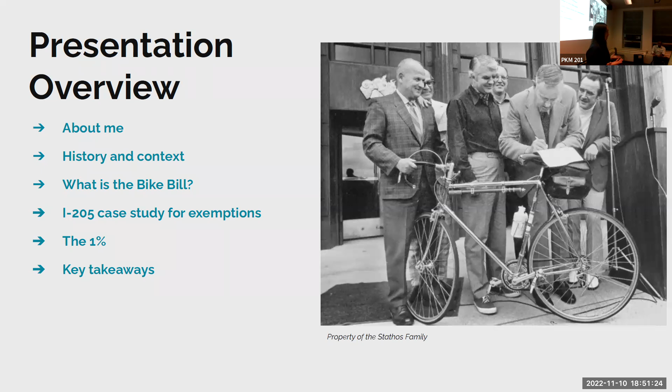Okay, so a little bit of background about me. I have an interest in advancing biking and walking in Oregon, and I've done that through different capacities.

I actually first met Judge when he worked for the state of Oregon in the governor's office, the executive committee's office, when I was recruited to be a member of the Oregon Bicycle and Pedestrian Advisory Committee. In my role on that committee, I was asked by a community member to look at ODOT's interpretation of the bike bill as it applied to the I-205 freeway expansion project.

My passion also is accountability and transparency, and trying to demand that from our agencies, because as public servants we need to demand and see what we're getting from our investments. I don't know if I'm good at it, but I do demand, and I ask a lot of questions.

Through this work, or through being on OBPAC and exploring the bike bill, that was the inspiration for my graduate school capstone. So I dug deeper into the policy implications of the bike bill and wrote a paper on it. You can download it after class if you'd like to read through it.

As a result of this work, I worked with the Street Trust when Judge was there too. We have these connections, and we helped introduce an update to the bike bill, which was unsuccessful in the last legislative session. That was SB 395, Safe Routes for All.

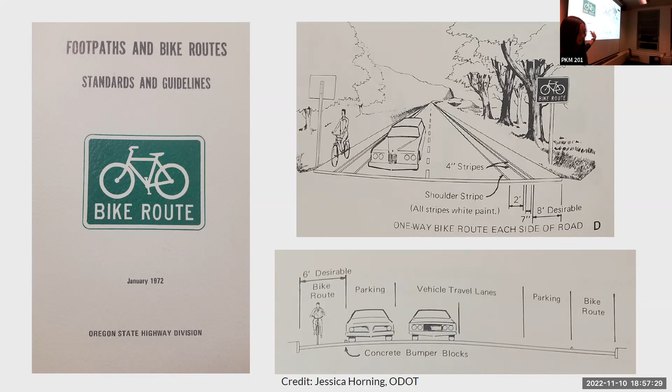So in Oregon, here are some statistics. Oregon by the numbers: we have 2.2% of commuters biking to work. Remember the goal was 23 to 24%. In Portland it's around 5 to 7%. I'm not quite sure what the commute mode is these days because of the pandemic.

The percent of bicycle fatalities is 1.9%, a little bit lower than average. We expend annually about 21 million of the state highway funds on biking and walking - that's ODOT's average from 2014 to 2016. So just some quick numbers.

But the thing that's really striking is that in the last 50 years, the percent of urban state highways with bike lanes and sidewalks in 2019 was 39%. So in 50 years, we've only been able to build 39% of the bike lanes that ODOT has planned out.

Now I'm going to go through each one of the different pieces of the law, because I think it's really important to understand what each one means. The first is: when does a project trigger the bike bill? You can go to the ODOT website in their highway design manual. I know there's a lot of words here, but basically ODOT has a categorization.

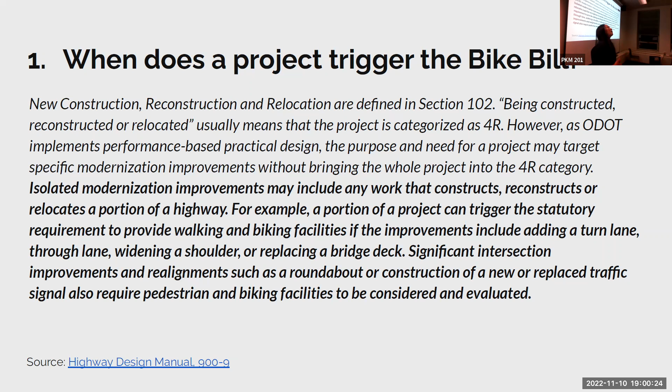So, exemptions - I mentioned the three exemptions before. One important thing is that an agency can have an exemption, but they need to document it, and they also need to allow opportunities for public review and input by interested parties. These are the rules ODOT put together for their exemptions. So if you are following an ODOT project on an ODOT-owned facility and wondering why there isn't a bike lane or sidewalk, ask to see if there is a design exemption, and then ask for the documentation on why there is an exemption.

Okay, I know I'm doing a lot of talking and there's a lot. Yes, go ahead - what about the 'contrary to public safety' exemption?

How is that usually defined in terms of adding a bike lane or sidewalk being contrary to public safety? That's a good question. In the case of ODOT and freeways, they have the ability to issue an administrative rule. What that administrative rule does is prohibit biking and walking on certain parts of the freeway. They're saying these sections are not safe because of traffic, because of the speed of traffic, the volume of traffic, or a narrow bridge. But as I go through this, you'll see some contradictory statements.

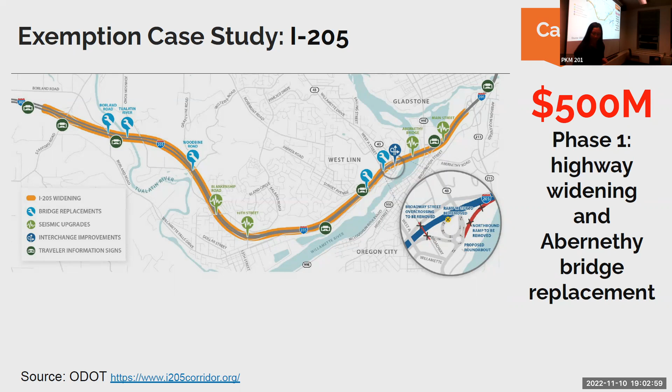And here is the contrary to public safety exemption. When ODOT was considering replacing the Abernethy Bridge, they did look at options to add a separated path or trail on the bridge to accommodate biking and walking. But in consultation with the Department of Justice, citing their administrative authority under OAR, they decided to prohibit and restrict bicycles and non-motorized vehicles from that highway. So essentially they're saying this is contrary to public safety since they don't allow people to bike and walk. That's one way they are exempting themselves.

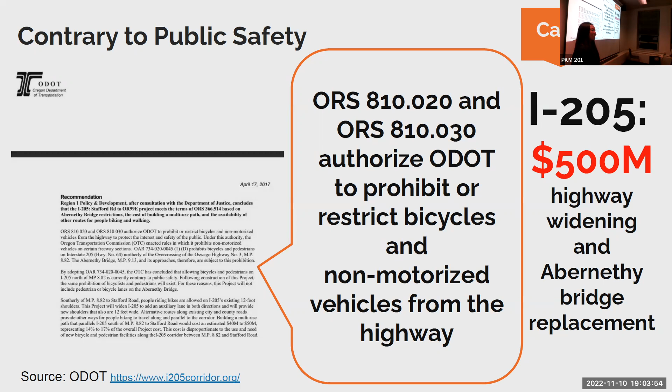But we know that ODOT has built separated pathways on sections of freeway. This is the Glen Jackson Bridge, opened in 1982. I don't know if it's the ideal path, but it is a path in the middle of I-205 connecting Portland and Vancouver. It's the same OAR restriction, biking and walking not allowed on the shoulder, but here they decided to add a multi-use path for people biking and walking.

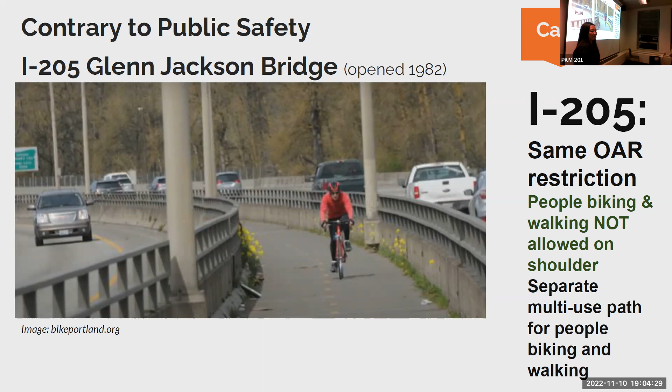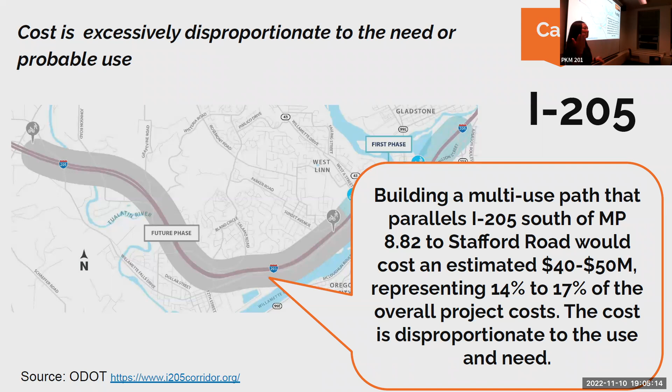Going down the exemptions, another one is that the cost is excessively disproportionate to the need or probable use. Looking at the entire project, phase 1 is just the Abernethy Bridge. Phase 2 is from the Abernethy to Stafford Road. They looked at adding a multi-use path for that section, but the cost would be $40 to $50 million. Their justification is that 14% to 17% of the overall project cost is too high based on the people who would be using this multi-use path.

Then here's another exemption for themselves: other available ways or factors indicate an absence of any need for such paths or trails. Their justification, again using the law as written 50 years ago, is that alternative routes along existing city and county roads provide other ways for people to travel parallel to the corridor. So that's another way this agency is exempting themselves.

But this is where I feel like as citizens, we need to raise questions, like, how is this safe — riding along the highway on this section of 205?

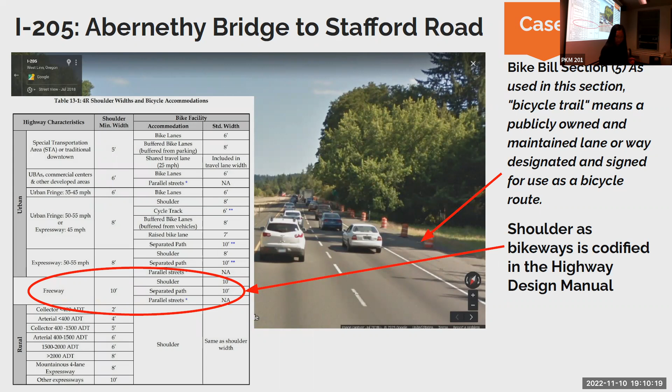I want you to think about how that compares to highway expansion. We know that the Rose Quarter, current estimates, is going to cost between 715 million to close to 800 million. One thing I find very ironic is that they forgot to include the cost of inflation in their preliminary estimates, and the cost of inflation is basically what was expended on bike and ped projects over 32 years. So that's just a point of comparison.

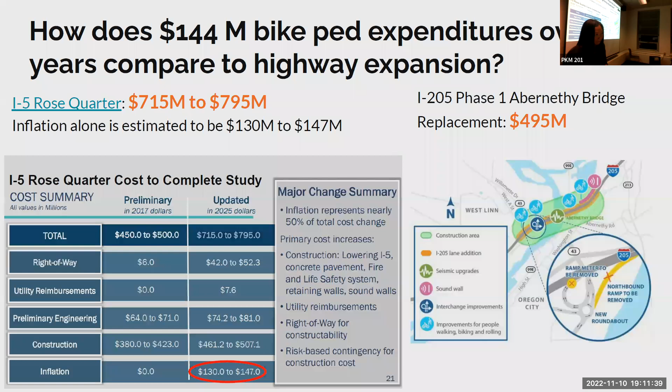And then the cost of replacing the Abernethy Bridge is close to 500 million. So we need to ask more from our agencies. The 1% is inadequate however you slice it, because even with the current level of funding, as I showed you in the graph before, it's going to be impossible to complete the walkway and bikeway system on the state system by 2030.

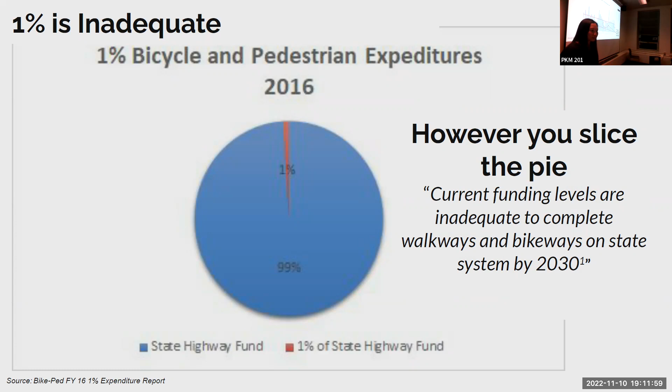Some key takeaways: the bike bill applies to any agency - whether it's ODOT, PBOT, Multnomah County, Clackamas County, whatever agency - if they are using state highway funds for a transportation project that requires reconstruction, they should be including bike lanes and sidewalks in it. It applies to all state highway funds.

The third key takeaway is that projects take a long time from planning to construction. When I was asked to look at the I-205 project, it was beyond planning - it was getting ready to be built. At that point, it's really difficult to impact change when you're not aware of the projects at the planning stage. Now that you know this policy and law exists, you can identify those projects.

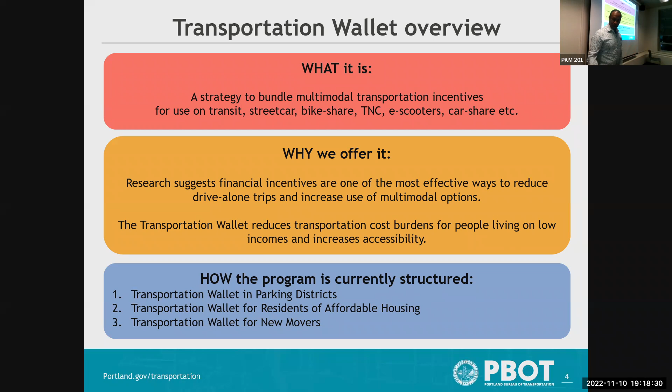So we talked about the why briefly. Really it's essentially to manage parking supply. A lot of this data, a lot of information was done before the pandemic. Currently, right now, there are more parking spaces available because our work model has changed. We have a lot more people doing remote working, so there's more supply for parking than there was 2 years ago.

But our goals really are the same. We really want to try to reduce single vehicle occupancy trips. It's better for the environment. We want to increase trips with other modes of transportation. So again, trying to get that mode shift with the transportation wallet.

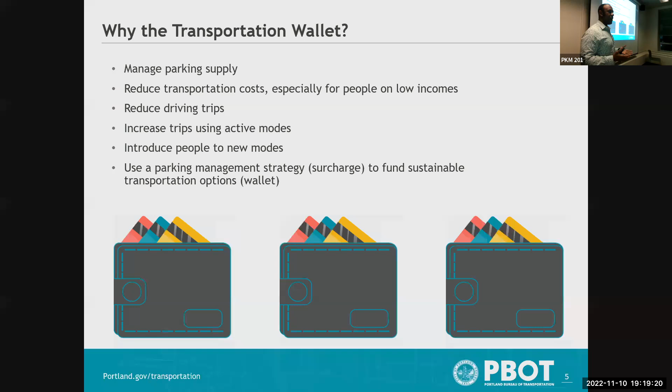So more specifically, the transportation wallet in parking districts. We have these two shaded areas, Central East Side and Northwest parking districts. To date, we've had over probably 7,200 transportation wallets distributed in the city since the program started back in 2017.

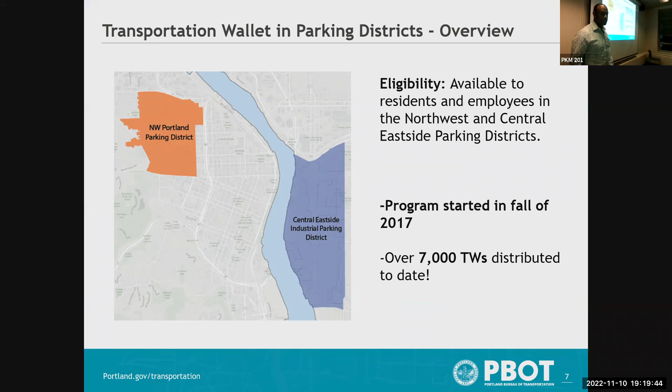This is how you can actually get a transportation wallet. You can either purchase it outright for $99. But again, you have to live in either the Northwest Parking District or the Central East Side Parking District to apply for the wallet program.

We also have an equity program, the Golden Transportation Wallet. You receive all of the benefits as you would for the $99 transportation wallet, but you get it for free. During the pandemic, we had a frontline workers wallet, essentially the same thing, for free if you worked for a business or something such as a store, or hospital, things like that.

So this is what you get. If you happen to reside in the Northwest Parking District, you get a TriMet Hop card that is loaded with $175. It is not a monthly contribution, it's a one-time contribution, so you use it at your leisure. And if you're in the Central East Side, you get $200 loaded to a TriMet Hop card, an annual streetcar benefit, $99 for Bike Town, $30 for the scooters - that's $10 for each of the scooter companies participating - and then for the car share, Free2Move, you receive $30 in credits.

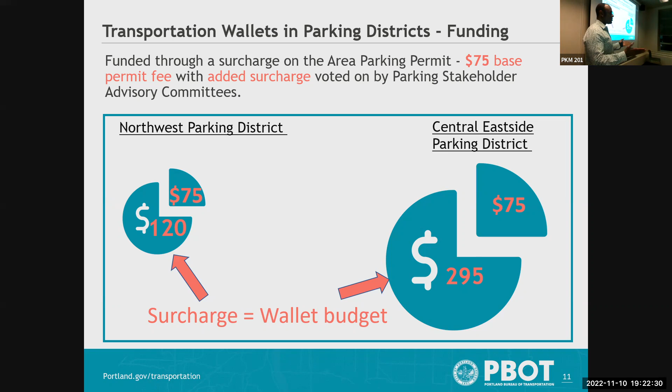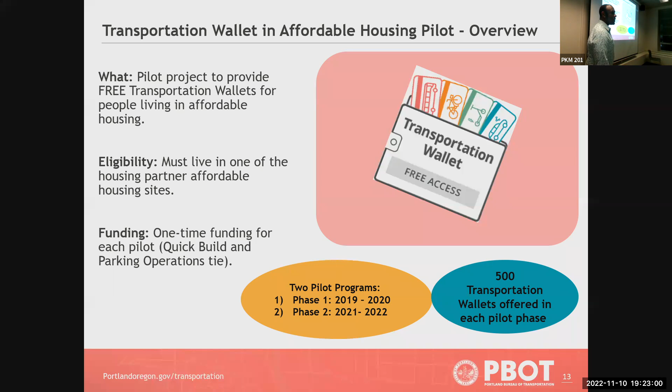The other transportation wallet we have is for the affordable housing pilot. It's no longer a pilot - it's actually being rolled into something permanent in 2023. But we had two phases worth of pilots where we reached out and worked with several community-based organizations and low-income housing agencies to provide these benefits. This is just a breakdown.

Anyone with an honored citizen pass for transit would also get a debit card loaded with funding that can be used for renting an e-bike, and also for taxis, Uber, scooters, and so forth.

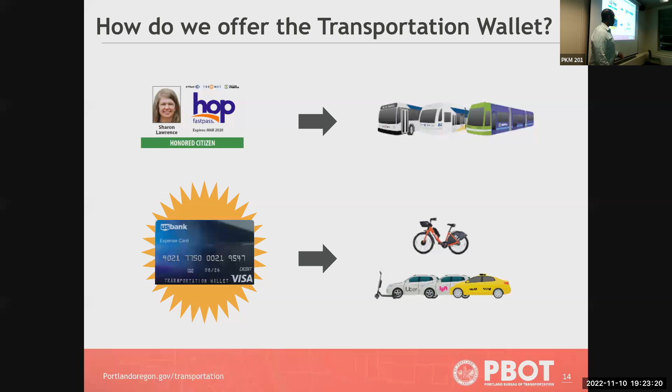These are just a few of the organizations we reached out to partner with during the pilot program, and they represent three different packages for the program. For example, if you're an individual you can choose separate options, and there's also a family component. The funding model is a little different when it comes to the Hop card.

That funding for the Hop card is actually broken out into however many people are applying for that household transportation wallet.

As of this year, the Transportation Wallet for Affordable Housing Project pilot - you can see how it just rolls off the tongue - is being changed. The name is being changed to Access for All. That's so much easier to say and pronounce. It's got great branding, you know, A for A. In any case, that comes to us courtesy of the funding approval for the surcharge.

You may have seen this if you happen to use Parking Kitty at all - you would have received the notification, I believe, in July when that was put into place.

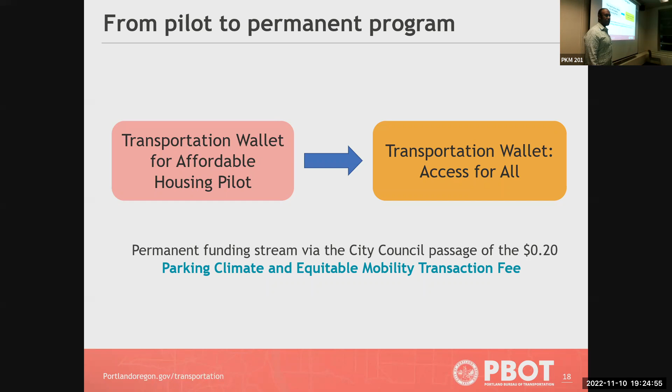Another one of the transportation products is the New Mover program. This one's a little different from what we normally do, but it still has some of the products of an e-bike and also a TriMet Hop card. This program is actually working with commercial builders and property managers. When the building comes online or receives its certificate of occupancy, these builders and owners pay into a fund that includes fees to allow their residents, based on the number of units in their project, to receive these free benefits.

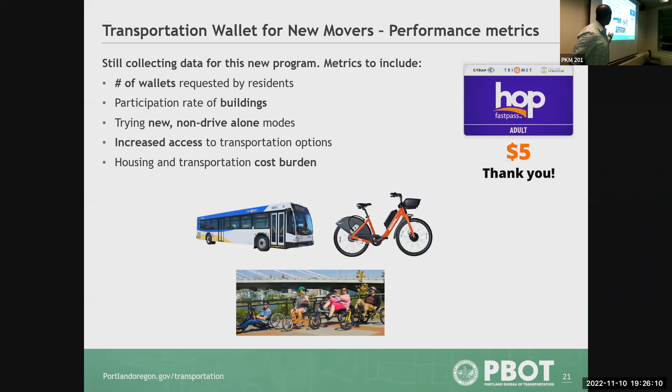I put the codes in there and coordinate with the building managers and property managers to get this information distributed to their residents. This is just, again, a breakdown of some of the products and why the metrics matter.

Lastly is the Transportation Wallet app. I mentioned the future - we are in the process of creating a wallet app. It will have all of that functionality at your fingertips. You'll be able to have your Hop card, your Biketown membership, all of that on your phone.

There's going to be a little icon that you download via the Apple App Store as well as the Google Play Store to your phone. We'll have a new website, we'll have new icons - this is what you'll find in the App Store. These will be rolled out in early 2023, probably spring-ish, around April, once everything has been tested.

It will have a lot of functionality, trip planning in the app. One of the things I'm really happy about is the instantaneous translation, so we'll be able to reach a broader audience in the city, in addition to the parking districts.

One thing I forgot to mention is in 2023, when we roll out the app, we won't have so much paper that we're printing, as well as me physically stuffing envelopes with a lot of vouchers - though I'll also send out emails with codes and things just as a backup.

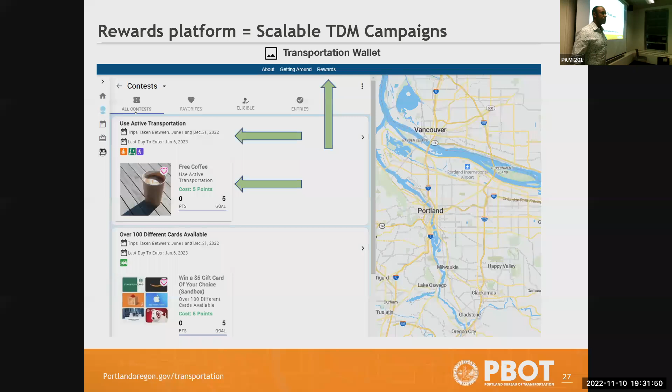Yes, Joe - is the transportation wallet renewable? Is it one time? How does it turn over and spend all the money?

So the transportation wallet is one per calendar year per person. It's not essentially renewable in that context, but each calendar year you're able to apply for a new one. And when the app rolls out, the way the funding will be done is, for example, you will have access to the first $100 of your Hop card benefit. You have to spend it down to 50 before you receive the additional 100 or whatever.

Does it run out at the end of the year, or does it roll over to the next year? Any monies on your Hop card are there - there's no expiration date on monies that are on a Hop card. As for running out, no, it won't run out. But there is a maximum dollar amount you can put on a single Hop card, which is $250.

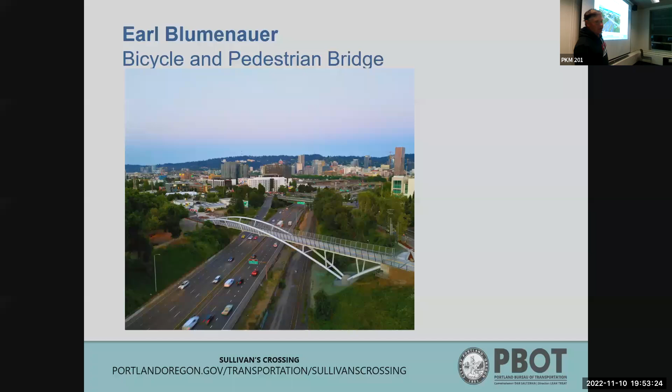So we'll talk a little bit about the Blumenauer Bike and Pedestrian Bridge. Do I do the slides or you do them? Whatever you like. I can do them.

So just a few fun facts on the bridge: it's 24 feet wide, allocated softly as 10 feet for pedestrians and 14 feet for bikes. The bike side is wider because of the slope of the bridge and the fact that you can get some speed going down. It's 434 feet long and the main span is 380 feet, so it's a pretty long bridge. It weighs 1,900,000 pounds - that's 380 elephants, if you care.

We'll talk about this in more detail - it's founded on grout piles, there's 28 of those and they're as deep as 150 feet. So there's a lot underneath the bridge that you can't see just from the top. We'll talk about the type of bridge - it's called an asymmetrical tied arch. I'll explain it to the best I can as a non-trained, not an engineer, certainly not a structural engineer - a planner who can kind of talk like an engineer sometimes.

And then the last fun fact, hopefully never really needed, but if there is the big one - the 9.0 massive earthquake - this bridge, at least theoretically, will be available for use by emergency vehicles. Somebody asked me once, will it be used for bicycles? And I said, I'm not sure that's going to be really high on your list of priorities at that point in time, but yeah, I suppose you could ride your bike across it.

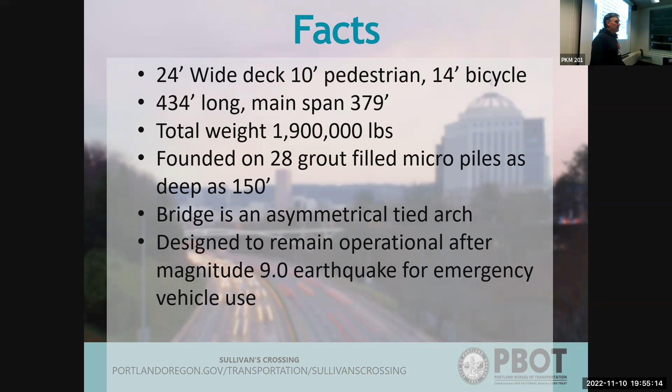So just a little bit of context and background. We've talked a little bit today about transportation planning and bike planning in the city. Most of you are probably familiar with this, but the city actually has a really solid bicycle and pedestrian network. I've been in lots of cities, both here and in Europe, and Portland's bike network is really pretty remarkable, particularly for a United States city.

The reason is you can really get around most of the city. It's really strong in the east-west direction, not as strong in the north-south direction. One of the reasons for that is the freeway. And it's not just the freeway, it's a natural gorge, the Sullivan's Gulch.

Particularly in this area, that was really challenging. So we've been looking for a number of years at possibilities, ways we could bridge that gap. The Lloyd District is obviously a critical land use area with lots of commercial development. The Central East Side is growing enormously, particularly residential-wise. There aren't a lot of great ways to get across the freeway at this location.

MLK and Grand have okay sidewalks, but you have to cross over the ramps, and they don't work very well at all for bikes because of the streetcar tracks. 12th Avenue is a decent crossing, we've squeezed just about as much as we possibly can out of it for bikes and pedestrians, more for bikes. The pedestrian sidewalks are fine, but it's not really connected to the district. So having a bridge in this location has been a desire for a long time.

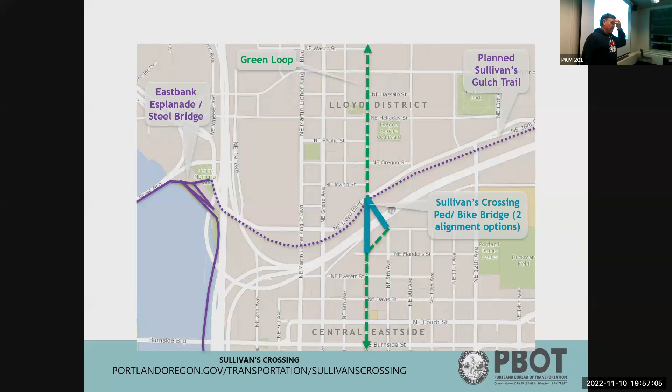But it's also a really challenging place to build a bridge, and I'm going to talk about why. The major reason it's challenging is because of who owns the property and what the land underneath the bridge is used for. As you're well aware, PBOT is the owner on both sides—we own Lloyd Boulevard, we own Flanders Street. We also own most of the slope and bank on the north side.

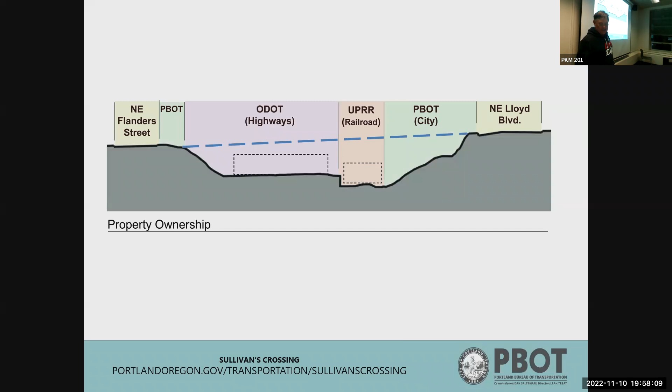Obviously, Union Pacific Railroad owns the railroad and ODOT owns the highway. What made this challenging in particular was the fact that we did not have access to a big chunk of the area we were bridging. Not only did we not have permanent access, we couldn't even get temporary access. So it was really necessary to build to bridge that area—that was the critical element. That's a fairly long section, which is why the bridge is as long and as big as it is.

So we looked at a variety of different options. I'm not going to go into this in great detail, but we looked at kind of the prefab steel through-truss bridge, similar to what we built for the Flanders Bridge. We looked at a couple of other options, kind of an arch, and we looked at the crazy cable-stay option, which was way too expensive. The option we came up with was this steel deck tied-arch bridge, and I'll explain that in a little bit.

So this picture is a good explanation of this. The way this works—there's a great story here. When we were first talking about this bridge, probably five years ago, we were in the offices of KPFF, the engineering firm that designed the bridge, talking about different options and what we could potentially do. One of the designers went up on the whiteboard and just drew this thing.

We could do an arch like this, and we could do the deck, tying the deck to the arch. It's essentially what we built—even that long ago, we had kind of figured out a good option. So what this does is the arch is a very strong structural member, and it allows us to span this entire bridge.

Most of the strength of the bridge is really in the arch, and then the deck, where the bikes are, is tied on to the arch. So it has some supports that support it up on one side and allow it to hang on the other side. That provides a bridge that's both in compression and tension, which my engineers tell me is a really strong thing. So it works really well.

That's the story of how that came about, and I think the other nice thing about it is it provides a very elegant kind of jump over the freeway. So that's a little bit of the background of how we built it and why we built it that way. Now a little about how we built it.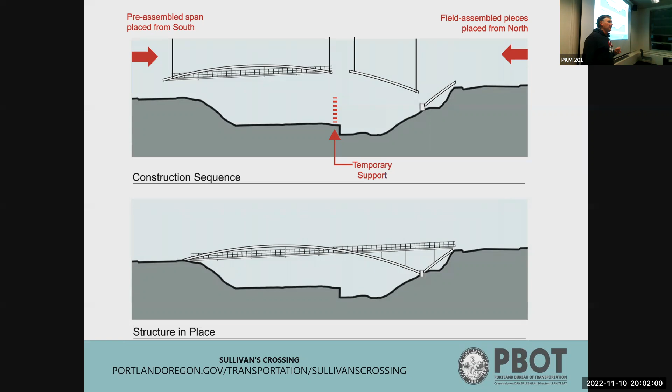Some of you might have been there. Was anybody there when we did that? We actually had quite a crowd, it was pretty interesting. So just some pictures on the construction of the bridge, because I think it's interesting.

The first thing you do when you build a bridge, which may be a little counterintuitive, is you build really big holes on either side of where the bridge is going to be founded. So this is the construction of our supports on the north side.

We also really needed to get a little bit more land on the north side, because if you've been over there, you can see there's a fairly good sized landing. Most of that wasn't there originally — that's the area we had to create. So we built a retaining wall and expanded out and flattened that north side.

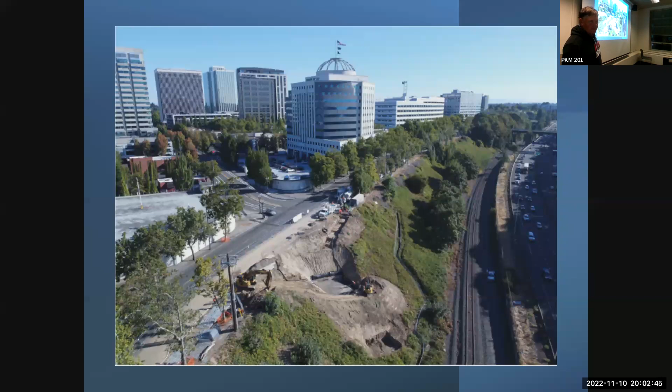So this is the contractor starting to work on the retaining wall. These are just some photos of the construction, because construction photos are kind of fun. Here's another shot of our construction.

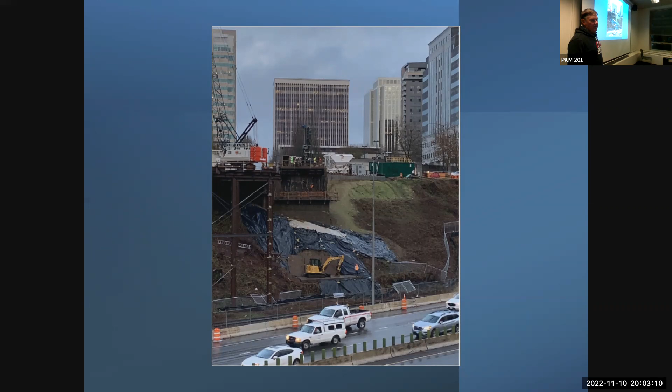This is taken from the other side of the freeway, and you can see the excavation and the slope, and really the challenge of this project — the limited amount of space to work with between the railroad and the freeway. So it was a really tight setting.

This is a shot taken from the north side to the south side. You can see on the south side that the structure is taking place, the temporary structure or the permanent structure, and you can see the wall and the beginnings of the landing that we built.

I had a lot of people ask me this question when the structure got to this point — they said, it doesn't look like it's going to line up. And I said, yeah, that's a temporary work bridge, that's not the permanent bridge that was on that side.

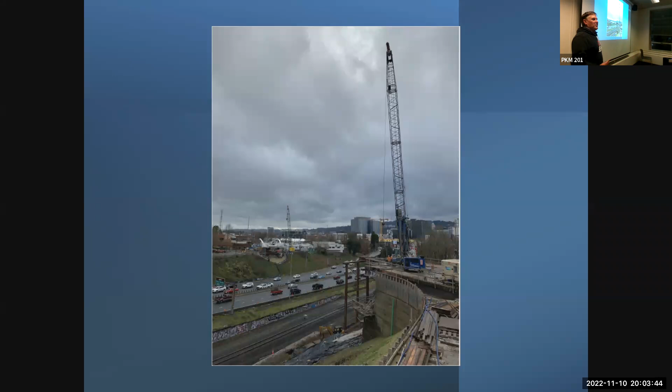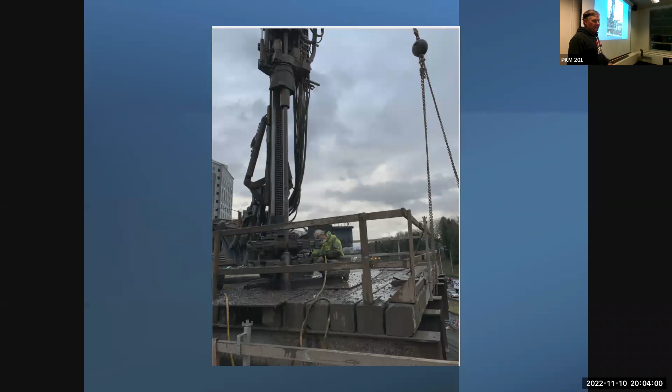So you can see another shot of the work bridge and some of the work that's going on underneath. And then this is on the other side, the assembly of the structure. The steel was actually fabricated in Vancouver, up in Washington, and then brought on site in pieces.

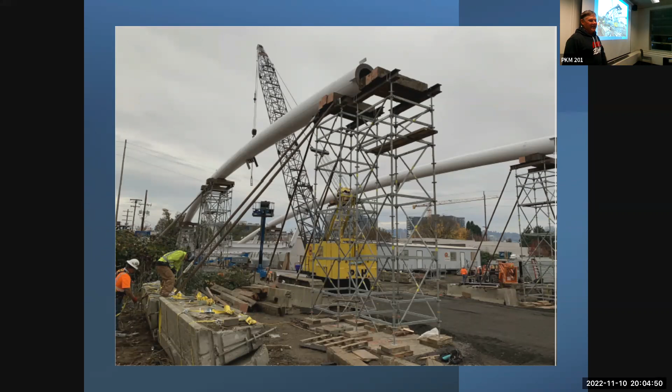And that worked really well until the last piece where we hit a TriMet bus, which unfortunately there was only one person on the bus, the driver, and he was actually injured. Not seriously, but it was one of those very slow motion things where the truck just didn't quite make the turn. But anyway, that was fun.

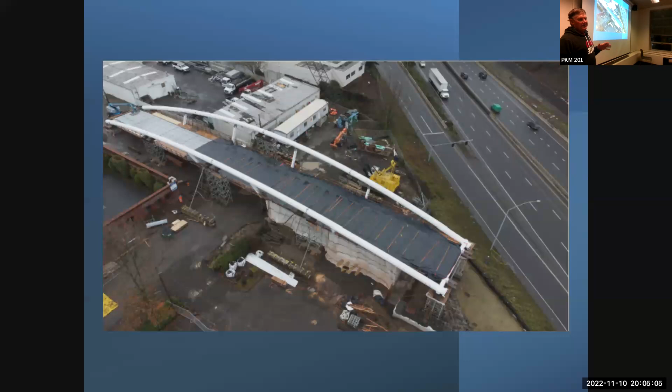So this is the structure now in place. You can see on the north side, or on the south side, it was brought over and then assembled in pieces. And this is just about before we did the launch.

So probably the most critical and most difficult, challenging part of this project was actually launching the bridge across the freeway. One of the reasons for a fairly significant delay wasn't so much getting ODOT comfortable, it was really getting the railroad comfortable with what we were going to do, because right after we put it on the temporary tower, we needed to be able to put it across the railroad.

So it was about getting times where we could get closures from them, and the railroad's hard to deal with. That's just the bottom line. They're the railroad, they've been there forever. They're challenging. So we finally did get to the point where we were able to close the freeway in October of 2021.

And this is the start of the process. It was a huge process to do this. This is what's called a gantry crane that you can see here, the green crane. Essentially, it lifts and holds the bridge in place, then slides it, or pushes it across, kind of like a set of railroad tracks, to the other side.

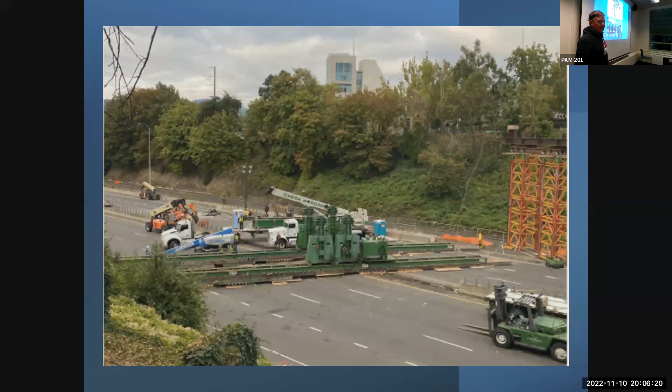So this is the gantry crane being assembled on the freeway on the morning of the lift. This is the crane being put into place. There were several cranes that they used.

Congressman Blumenauer was actually there for a good part of the lift. As you are aware, the bridge was named after Earl Blumenauer, who, some may not know, was actually a Portland City Commissioner for a number of years before he went to Congress in 1996, and has been a huge advocate for bike and pedestrian activity, both in the city and at the national level. So we felt it was really appropriate to have this bridge named after him. He also grew up not that far from the bridge, in Northeast Portland.

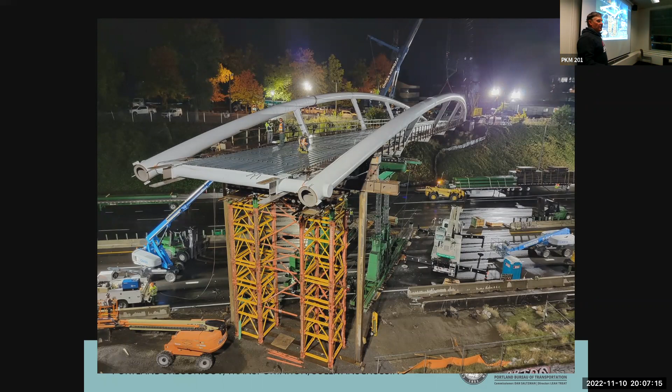So now you can see the lift. The bridge has been brought across from the south side to the temporary supports on the north side, and is in place.

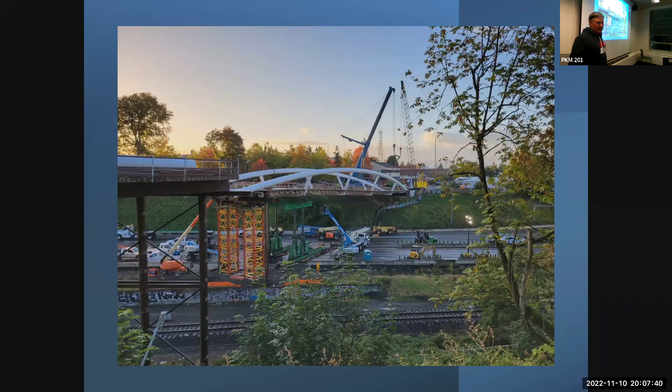There's another shot of the lift where you can see them putting all the pieces together, and you can see the gantry crane holding the bridge up while it's being put onto the temporary towers. That whole operation took about nine hours. There's a great video online, I don't have access to it right now, but there is a great video online if you're interested in that.

After we put the bridge in place on the temporary towers, we had to pretty quickly build the rest of the structure to provide the support so that we could remove the temporary towers. So that's what's going on here.

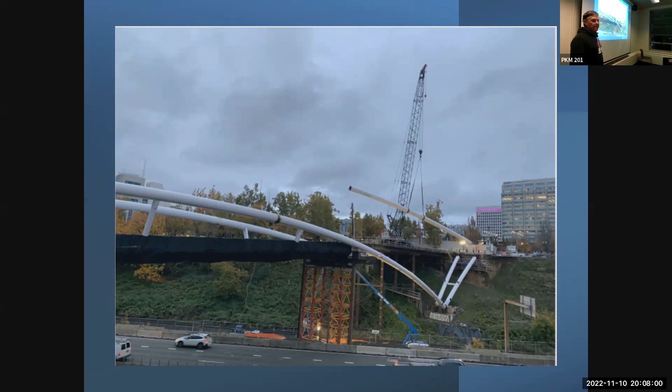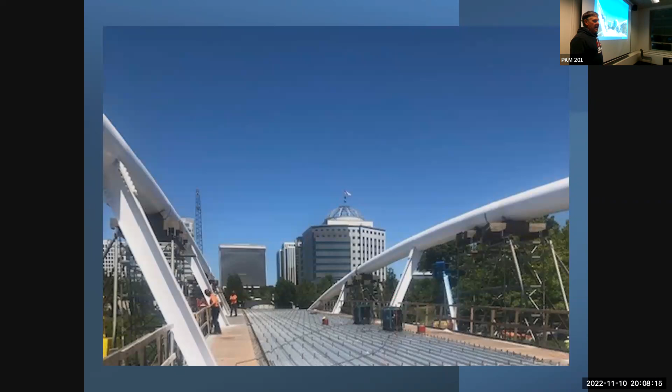And there you can see, this is a shot from 12th Avenue. You can see that the bridge, now the arch, is completely in place, and they can start working on the deck. This is a shot from the deck. You can see there, this part here is temporary walkways, and this is the actual deck. So it's a steel deck with a concrete deck poured on top of it.

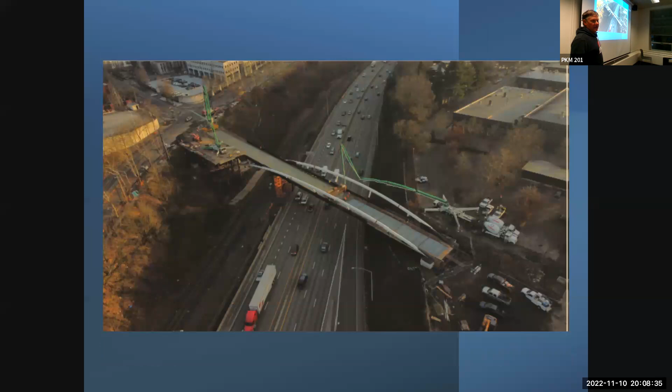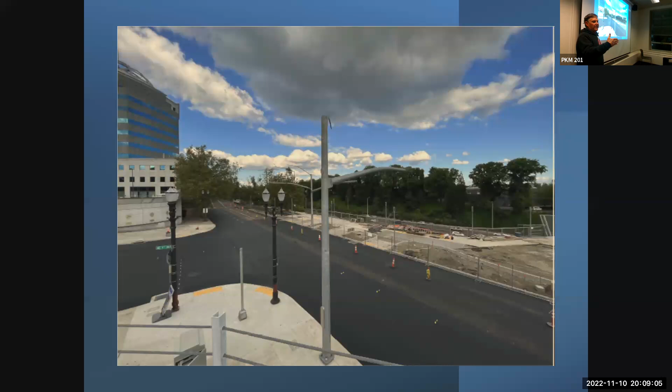This is a shot of the north landing as it's being constructed. If you've gone across, there's a little bit of a jog. The reason there's a jog is because 7th Avenue is actually kind of turned in order to line up with Lloyd Boulevard. So that jog is just there naturally.

I think that's it. Yes. So that is the story of the Blumenauer Bridge. I'd be happy to answer questions.

I see. Yeah, and I can also answer questions about other stuff as well. But I know we're going to do a little panel discussion.

Is that right? So the Sullivan's Gulch Trail going kind of on the north side of the railroad tracks - does that go to the Steel Bridge or is it Blumenauer? How are we going to get into that ravine? Where is the entry point? Is it a pass or - darn good question.

We looked pretty carefully at the Sullivan's Gulch Trail as part of this. We did provide room for it to happen, but it's a really challenging project because there just is not a lot of room in a lot of those places. So I'm not sure exactly what's going to happen with that in the future.